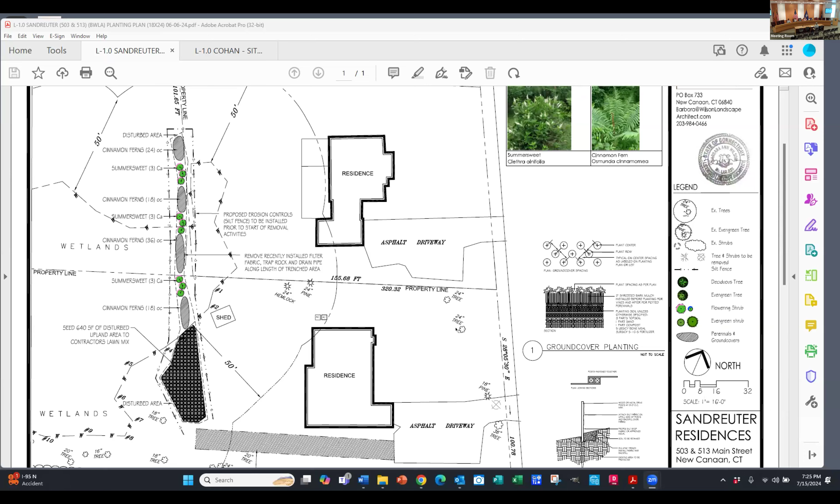Can I hear a motion? This is Angela Jameson. I move approval of the application with the 3 special conditions that we have just discussed.

I'll second that. Sanford, I'll second it. Beth, are you going to second it? Good. Yes. Go ahead. All right, all those in favor? Aye. All those opposed? Motion carried. Thank you.

So Barbara, you're still with us, huh? Yes, I'm here. So I was just getting the Cohan property plans up so I can show you that. Application number 2424, 109 Michigan Road.

Well, I could read all this, but I don't think I need to. Barbara Wilson, agent. You want me to start? Why don't you start, Barbara? Yeah, so the owner is looking to do some updates to the property, which includes removing an existing asphalt driveway.

And resetting the curbing and then re-asphalting it in the same location, which is this, let me share my screen, sorry. Uh-oh, where'd it go? Sorry, I lost the share screen. There it is. Okay, now can you see it? Sorry.

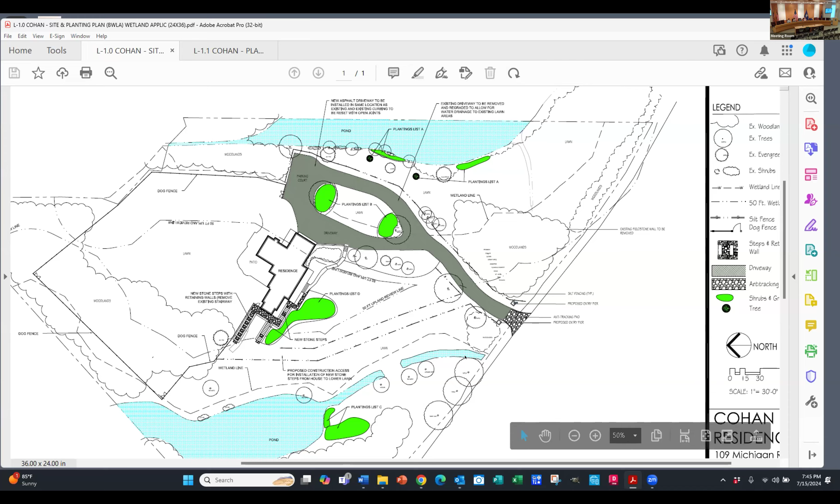Angela, I wrote it out as well—she probably said it better. I said: confirm that all dog fences are out of the wetlands, and if not, remove and relocate to the upland review area. The second condition was similar to 513's, where upon completion of the plantings and landscaping, the architect shall provide a final report.

All right, can I hear a motion to approve with the two special conditions? I make a motion to approve application IW-24-24 with the two special conditions as noted. Can I hear a second? Second the motion. All those in favor? Aye. All those opposed? Motion carried.

So thank you so much. I look forward to seeing you next month when I'm able to walk around finally. Yeah, you're on again next month too, aren't you? Really? Yes, thank you, Barbara. Yeah, thank you, Barbara, thank you so much. Good seeing everybody.

All right, moving along. As everybody knows, we kept the public hearing open for the July meeting. We opened the public hearing in May, continued it into June, and continued it once more into July. However, we hope to close the public hearing tonight. We hope to discuss and vote on the application tonight. We will also discuss and vote on the interveners' recommendations tonight.

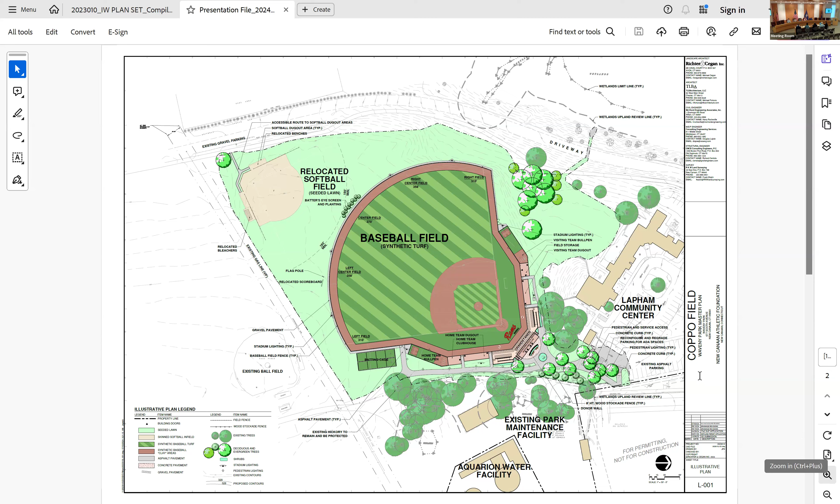We have items associated with the project itself, and it's our contention that the project will assist the drainage and actually help reduce the runoff and make it better than the existing, as well as some water quality improvements. There's a secondary concern from the intervener concerning a ditch that comes off of the southern catch basin, further towards the pool.

And to that end, I asked McChord for a proposal to review that ditch. I shared it with Kathy, the wetlands director, and with our town engineer, and I've written a memo requesting approval of that proposal. It's currently pending on the Board of Selectmen agenda on the 23rd of July, the next time the Board of Selectmen meet. I'm fully confident they'll approve it, and then we'll move forward with that work, because I consider that to be separate from this project, and it shouldn't necessarily be a condition for one project versus another.

And then the last was the issues with the state of Connecticut. I reiterated to Luke in that call that we'll help him with the state of Connecticut and the issues running along 106. He asked us to have our highway staff go out and take a look at the ditch, the culvert running at the intersection of Lapham and 106 that faces towards his property.

Our highway department will do a cleanup in that area to try to help with the flow itself. So of the three items they've been concerned with, we can address the one with the project itself. The second one, the ditch, which is in our control, is already in play, and it will come back to this commission.

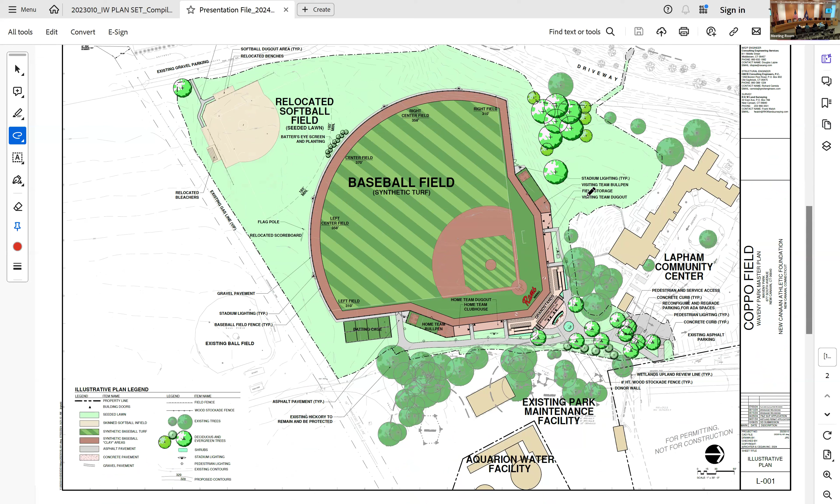The second change is the modification of the regulated activities plan. The intervener felt the project warranted expanding the regulated area to include the entire project. We didn't have any issue with that, so we've expanded the regulated area to include the project area of disturbance, which is about 6.66 acres.

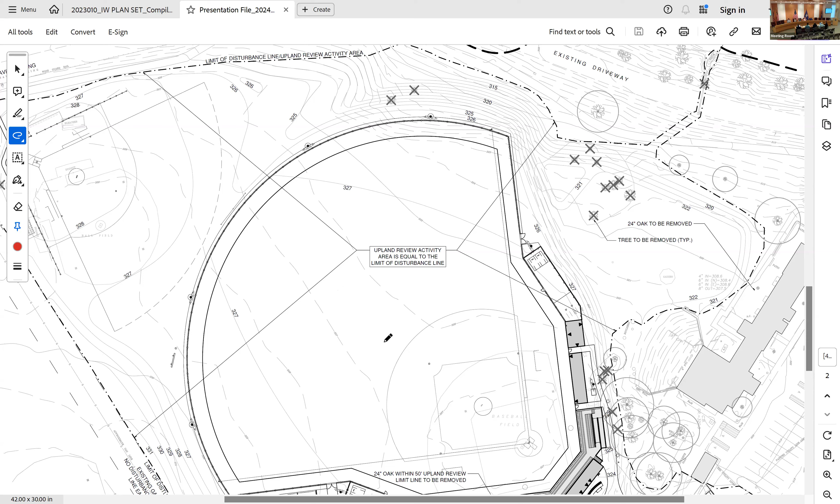As the director pointed out at the last meeting, this really doesn't change how the project has been presented, nor how the commission has reviewed the project activities. We have from day one presented the entire project: the turf fields, the related improvements to the field, the entire grading for the project area, storm drainage and utilities, and the E&S control. So essentially we've been presenting the project and the commission has been reviewing it for the entire project area. That concludes the two changes that were made based on comments.

Harry? Harry Rocheville, professional engineer in the state of Connecticut with McChord Engineering, for the record.

I just want to reiterate what Tiger went over. Since the last meeting, we've been coordinating with the intervener's engineer, Mr. Sakinchik. Right after we met, last Wednesday I believe, Tiger, he requested that we provide additional calculations and details regarding our routing for our stormwater model, and then the water quality volume computations. We gave him both of those items directly after the meeting.

Since then, over the weekend, we received additional feedback from him. We had a chance to review it this morning when we got into the office. His main request was to add a low flow orifice to our detention system to ensure that it drains between storms.

We did review that request, and it wouldn't conform to town drainage policy because we wouldn't be able to retain the water quality volume that we're required to, and secondly we wouldn't be able to control peak volumes of runoff for the property. So unfortunately we weren't able to take that request into consideration because it simply wouldn't meet the town's drainage policy. Even with that request, we maintain our confidence that our plan is designed to conform to that drainage policy.

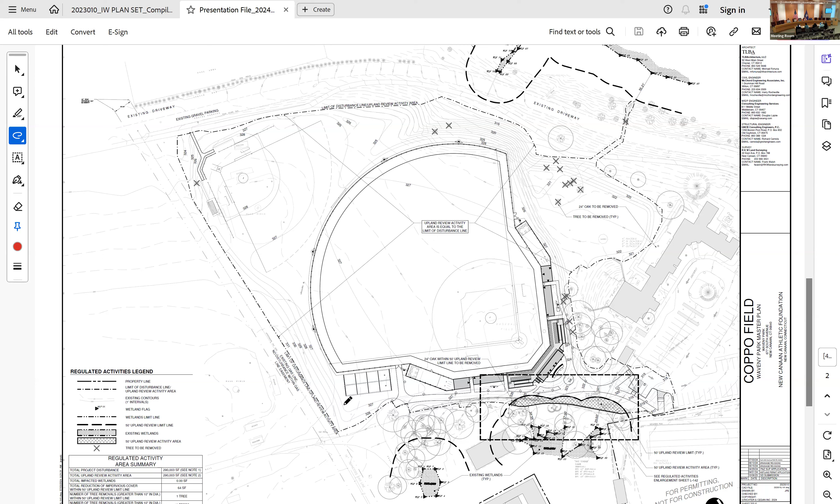Very good. So at this time we'll wait and listen to Luke and Jim and Alex, and then at that point I'd like to come back and have a final address with the commission. So you're finished? We're finished for the present time being, and now have Luke come up. All right, thank you. What?

Yeah, town engineer should go next. Town engineer? Okay, okay. I just recommend to the commission that maybe we hear from Maria Coplet next, based on Harry finishing his review. That seems to make the most sense to me. If that's what you'd like to do next, we'll have Maria come up. That's right.

Good evening, Maria Coplet for the record. My last memo that was presented was June 14th, and as Mr. Rocheville indicated, there have been no design changes since then, so there's been no update to that memo. We found at that time that the drainage analysis provided to us is consistent with our town drainage policy. In anticipation of the fact that we knew we were updating our policy effective July 1st to treat up to and including the 100-year storm event, the applicant had met that criteria.

So even though their submission was done prior to that, they met the higher threshold, so that is sufficient. The one last remaining item from our comment memo from June 14th has since been submitted, and that is a sanitary sewer evaluation, the results of camera and CCTV work, and their findings with estimates. But that is more part of the overall master plan of the project and our engineering review, and not necessarily applicable to the stormwater management considerations.

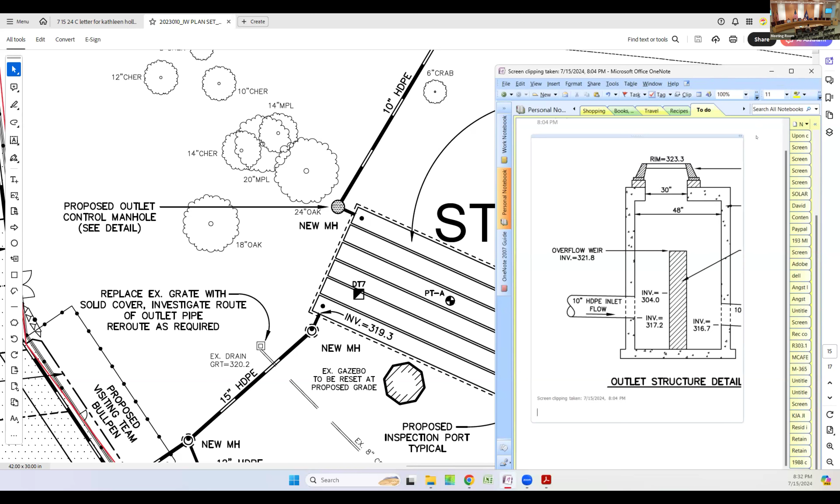Excuse me, I believe that was from the commission in our May 15th letter. We requested additional cross-section detail. Since updated, that rear has a baffle with near interior wall, also has 2 6-inch orifices in it, and obviously the capacity of that subsurface system is now at 100%.

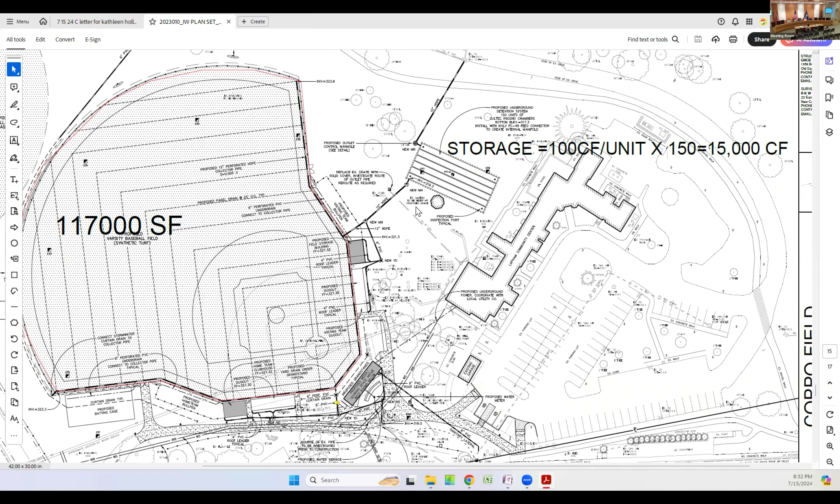Okay, I just wanted to clarify that because I think you're making comments on an older plan. So I don't know if Harry needs to confirm that as well, but I'll point that out. What I'm saying is, no matter if it's the latest plan or the older plan, I believe the outfall structure geometry is similar.

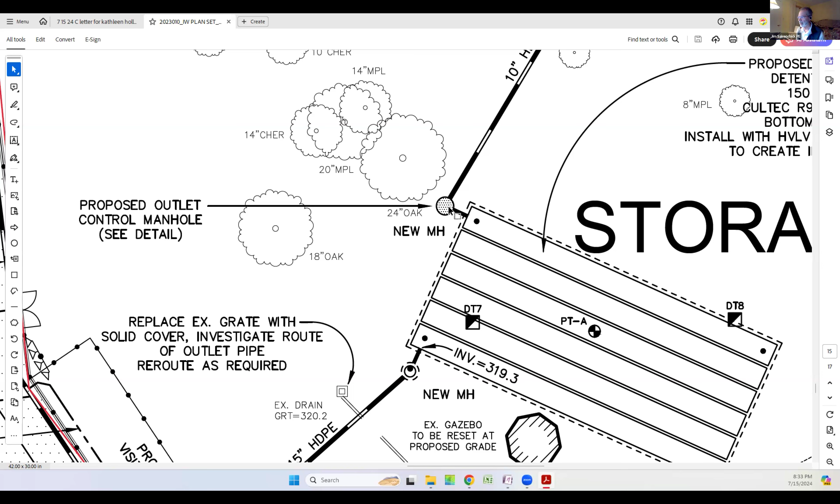And if that is the case, by putting a catch basin open-type manhole cover instead of the solid cover, in either condition, that would make a quick and easy way to see in real time what the water volume is in the Cultec system. I would ask Harry to comment as to whether or not such a situation is possible. Okay, thank you.

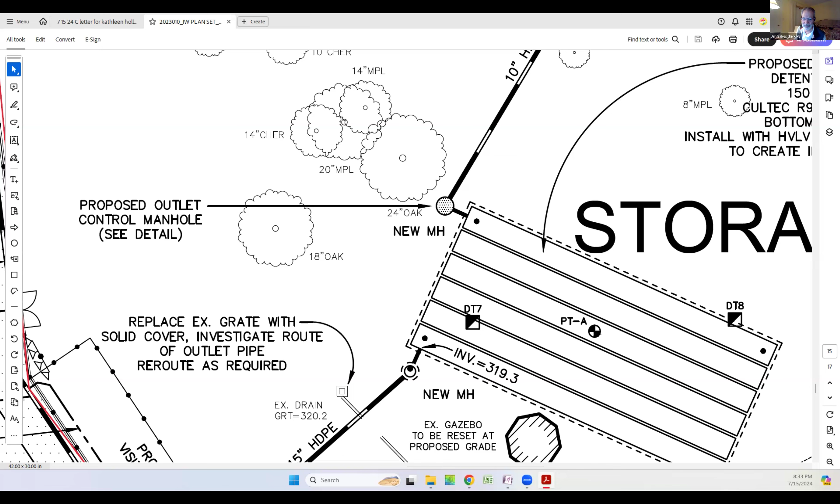Could you, yeah, I'm trying to form the question here. Can you tell us specifically what you're suggesting is going to help you? Could you tell us that?

I think saying it helps me isn't quite right, it's not necessarily helping me, but the conditions regarding the wetlands and water courses, I think, help people besides just me. So I would assume your question is, what am I proposing as a positive condition?

I believe the first condition, incorporating the language that Mr. Kenny mentioned from St. Luke's about certifying that it doesn't have PFAS, is important because the materials he introduced showed concerns regarding PFAS. So I would agree we should incorporate similar language.

The materials he submitted included concerns about microplastics, and also a recommendation about making sure there's a curb around it to keep those from leaching out. So I believe, based on those concerns, it's worth addressing the spread of microplastics.

They presented a new plan now showing the trees being moved from over the Cultec chambers and replaced, at least in the same number. So for condition 7, they're saying tonight it's essentially irrelevant because they're going to do that anyway. Whether or not that's incorporated, based on the new plans, doesn't seem to have an impact because they're presenting a plan now showing that.